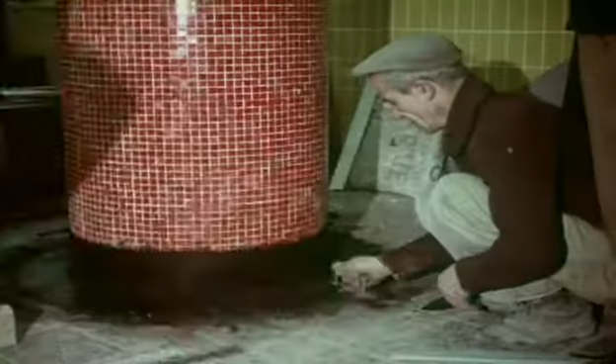Oxford Circus, base over apex.

With the first bite of the pneumatic drills, the TV cameras were rolling. But that night in Oxford Circus, only a small crowd looked in. It was the weekend, most people were out of town, and the models who saw it all in the fashions of 6 years ago couldn't talk.

So an operation began which had been on the drawing board for 18 years. It was, of course, raining. This was D-Day.

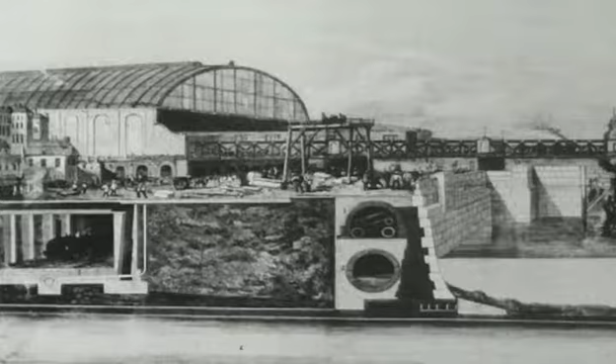In Victorian times, the great engineer Sir Joseph Bazalgette enclosed the Thames inside the embankment and built the main sewers to support 4.5 million people, essentially the same system trying to cope with 10 millions today.

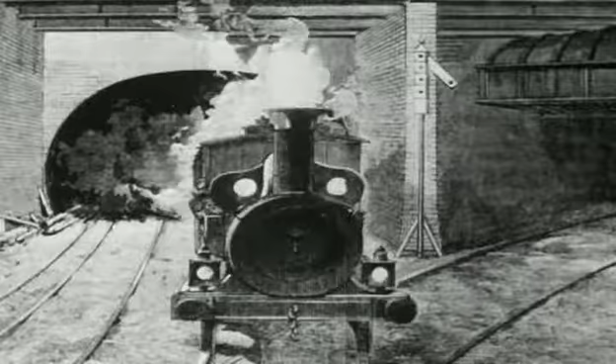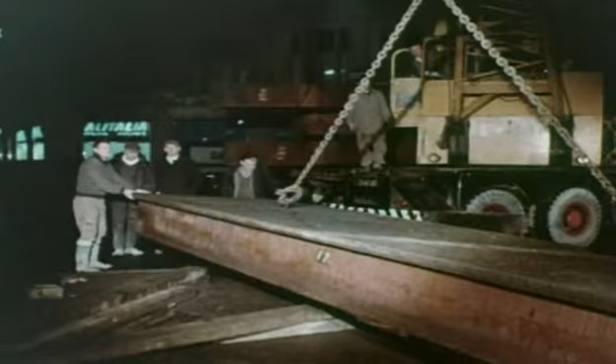In the 18th century, we established the canals, waterway roads. In the 19th, we led the world with iron horses. In the 20th, the technological age, it may be that the descendants of the Industrial Revolution are not so unworthy after all. Look at this, London.

Here's the plan conceived decades ago to relieve the indigestion of London's traffic by tunnelling a new tube line from Victoria to Walthamstow. Twin tunnels of 10.5 miles to link 4 mainline termini, Victoria, Euston, King's Cross and St Pancras, to slash right across the existing system and bring the underground to a new region in the northeast.

By any standard, it was a hell of an undertaking. No one knows all the secrets of brave adventure. In the autumn of 1962, the first phase was something of a small miracle.

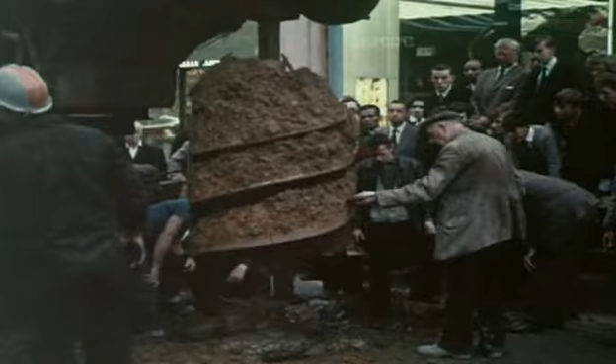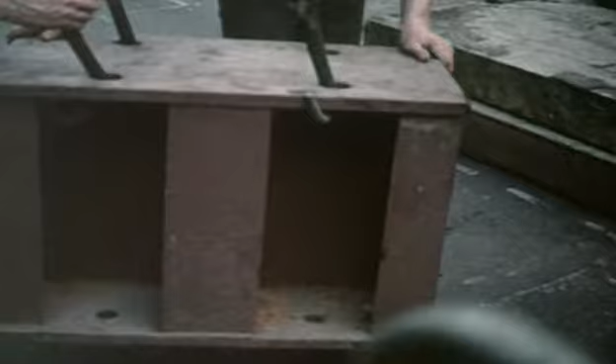Before they could begin mining underneath, as they were completed, the boreholes were sealed. Oxford Circus was almost ready for the opening of its steel umbrella.

To the outsider looking in, it all seemed chaos. Civil engineering usually does. But in fact, brute force and the muck of it is combined with a pernickety and almost an embroiderer's precision. Isolated in an island of noise, encompassed by the swirling West End traffic, the surveyor and his assistant worked with the calm concentration of an operating theatre.

They had to. The steel deck sections had to fit together without nuts, bolts or rivets, like a jigsaw. Otherwise it would be spillikins. They got it right to fractions of an inch.

Came that August bank holiday of 1963 when traffic and pedestrians were diverted. On the Saturday, the steel parts of the new umbrella, colour-coded and numbered, were ready. The target was that Oxford Circus had to be open for traffic by 6:30 a.m. on the Tuesday. Here's the story of a mere 65 hours.

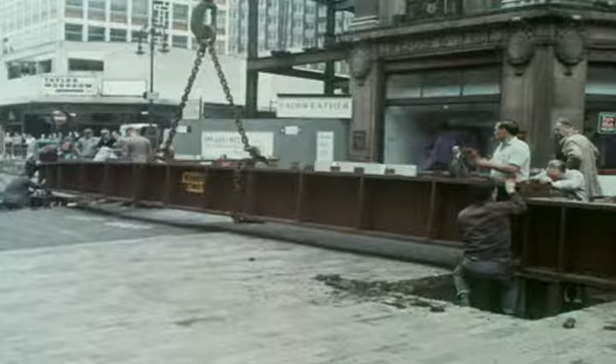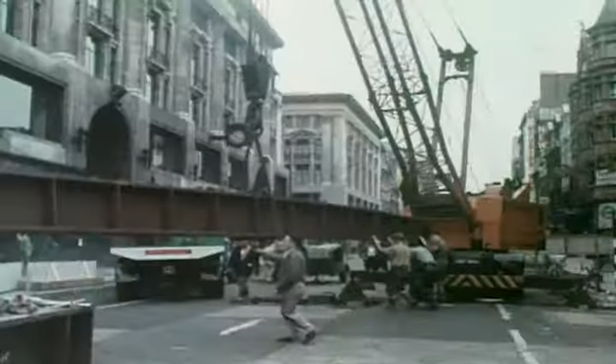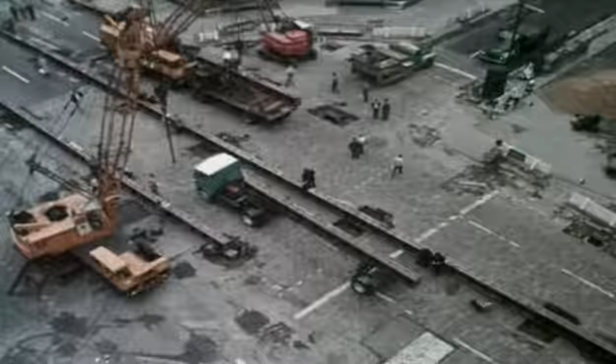The first girder went into position at 3:20 p.m. on the Saturday. Later that afternoon, the centre rib was nearly complete. At 7 o'clock, the first deck section went in.

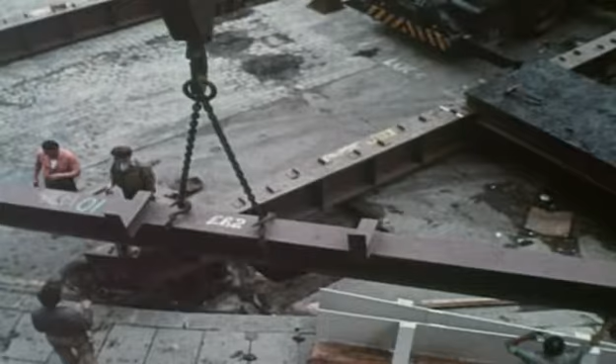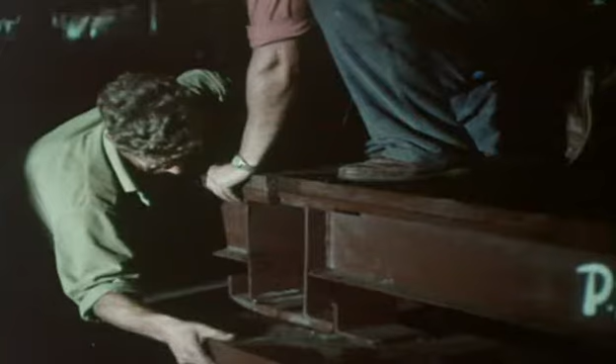The night shift took over, and the sections continued to fit. On Sunday morning, midnight: the one that doesn't fit has got to be this one. It's the last, and it does.

245 units in position in an average time of 11 minutes each. Just after midday on the Monday, with 18 hours to finish off the details, it was all over, bar the congratulations.

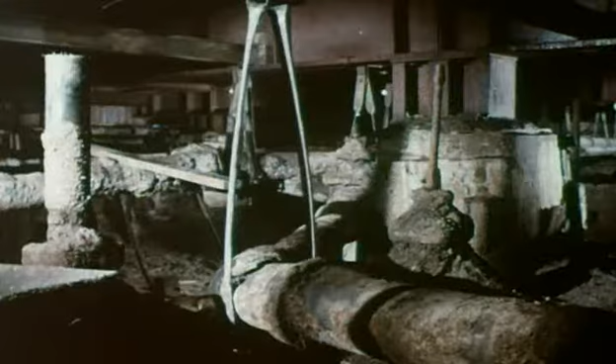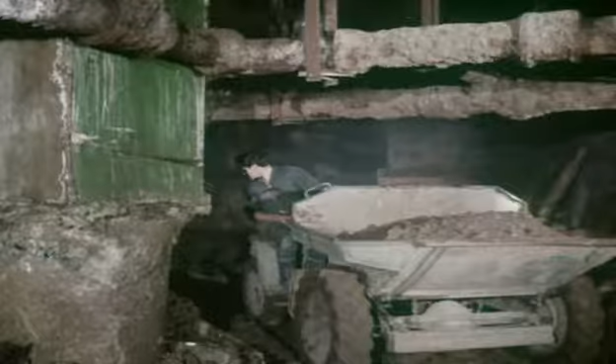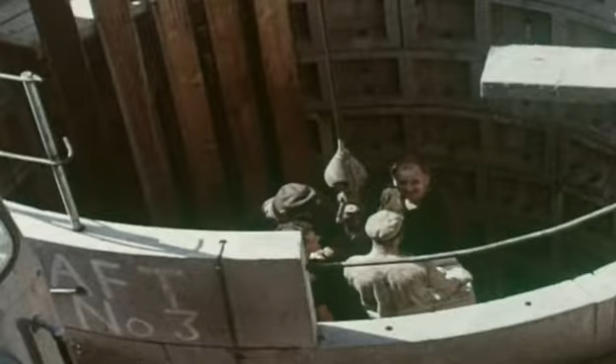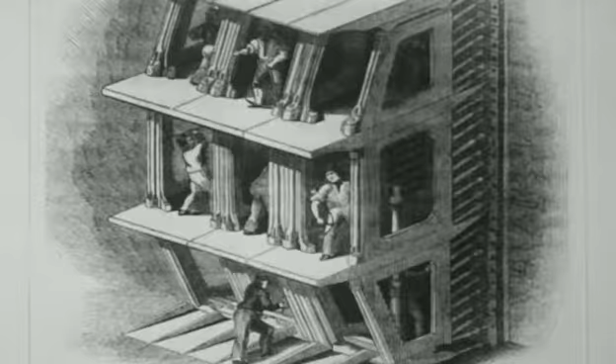We've advanced since then. A gang of 6 men working a modern rotary digger can clear a running tunnel through the clay at the rate of 2 inches a minute.

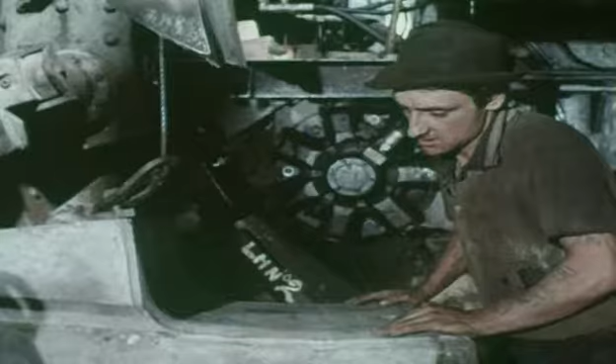The machines, lowered down the shaft to be assembled on the working site, can steer their tunnel accurately within a tolerance of 1.5 inches. They cut exactly to the diameter required for the passage of the trains. London clay, famous in tunnelling history since the 1890s, is the ideal medium in which to build a new tube railway, but it isn't self-supporting for very long.

So the tunnel lining ring must go in quickly behind the digging shield, 1 lining ring every 2 foot advance. Once every 15 minutes, the miners assemble a self-supporting ring of concrete behind the digger. No nuts or bolts, they just jack the segments under power and pressure into place.

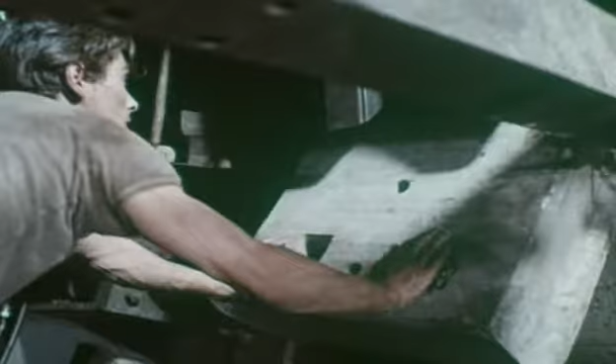The miners are specialists, working as a team.

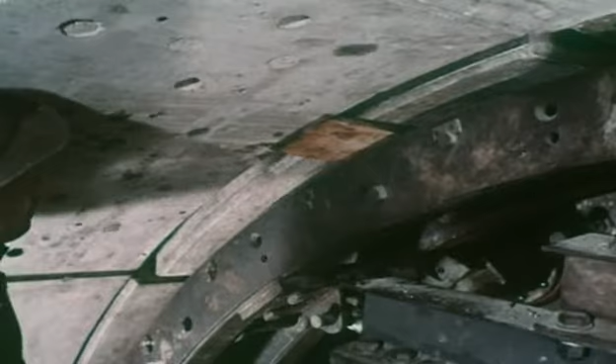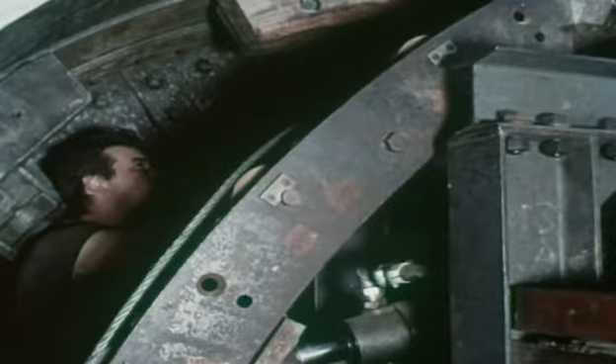Behind the shields, cutting the tunnels, there are long sleds and belt conveyors to get rid of the spoil. If you dig a tunnel, as any rabbit knows, you must get rid of what you kick out of it. Muck, that's what they call the clay, comes out fast. Skip trains haul it away from the diggers.

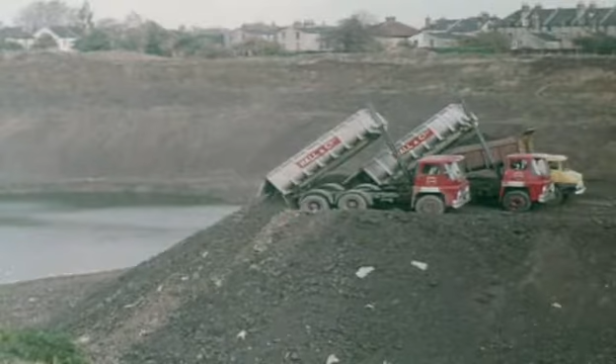And that's why we're doing it again. Underneath, the miners are clawing at the tunnel face to make a new artery for London. The first breakthrough, the meeting of two tunnels, is coming about.

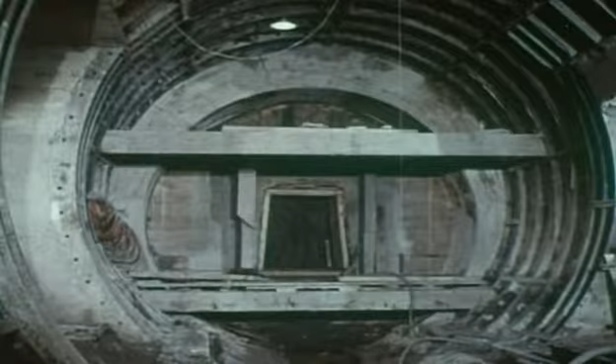The engineers, those cool men, are satisfied. Somebody else seems rather pleased with the result.

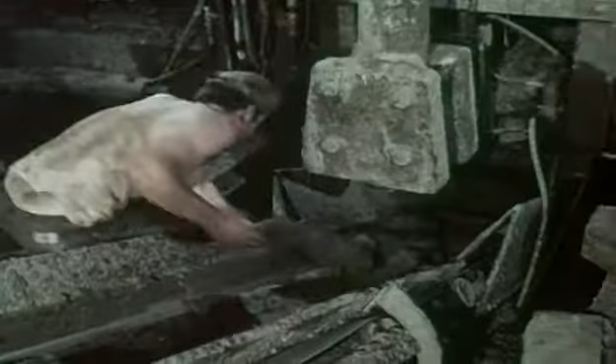The story of these islands. Sons of Ireland, almost all of them, descendants of the formidable navvies who dug the canals and laid the railways. The men who astonished Europe when the canals were cut in the 19th century, by cooking steaks on their spades over their bonfires. Back again, better paid, with pneumatic drills to help, to mine the new Victoria Line. Men with big appetites, mighty thirsts.

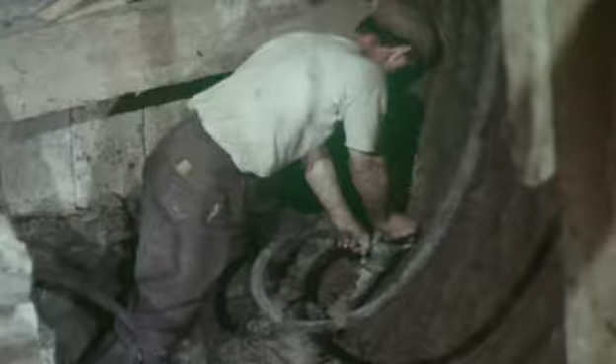It wasn't all plain sailing. While London slept, at a weekend in October 1965, a diversion was necessary at Finsbury Park to make life easier for future Victoria Line passengers. As a tremendous concession, the engineers were given 15 hours without trains to effect the changeover.

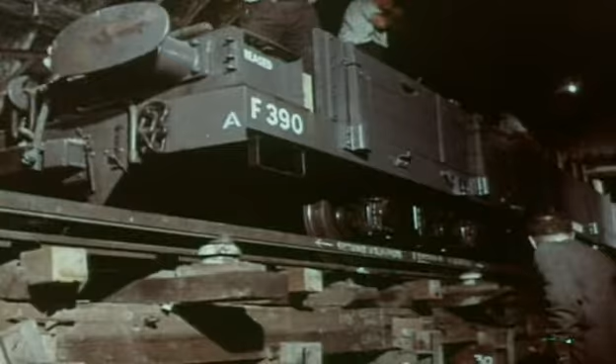As the last train of the night went through, and the passengers caught a fleeting glimpse of what was happening, temporary craneways built specially for the job lifted the awkward loads onto wagons which carried them away down the old tunnel. Every man on the operation was briefed exactly what he had to do. Millions of commuters would have asked the reason why if anything had gone wrong.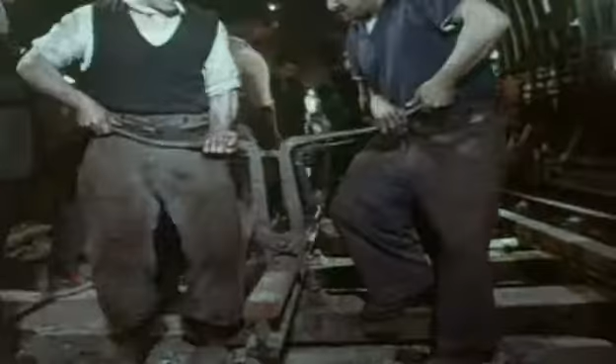But early that Sunday morning, the commuters were at home. Every move was meticulously timed. Old track removed, new track in readiness, new signals in the process of installation. What they did that night reminds me of the miracle of improvisation which was achieved on D-Day in the war. Apparently, we haven't lost something of the drive, at any rate, that we had then.

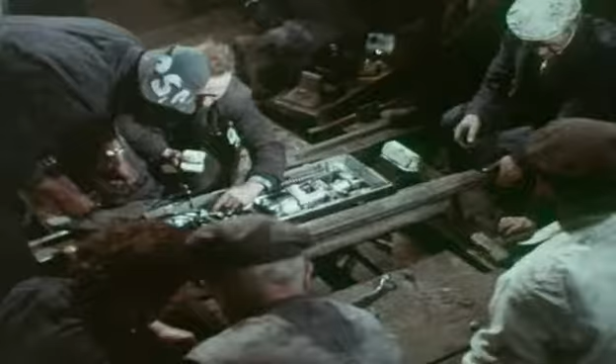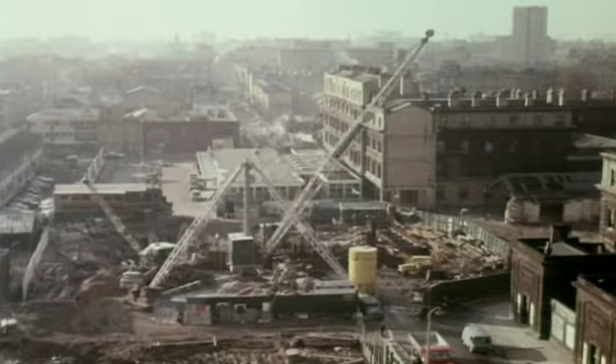Although London clay works well enough, the blue carpet underneath has holes in it. One of them is at Euston, where the line goes down to beds which are as waterlogged as a wet sponge. To prevent the water squeezing through into the tunnels, the workings had to be sealed off. High air pressure kept back the water until the work was done.

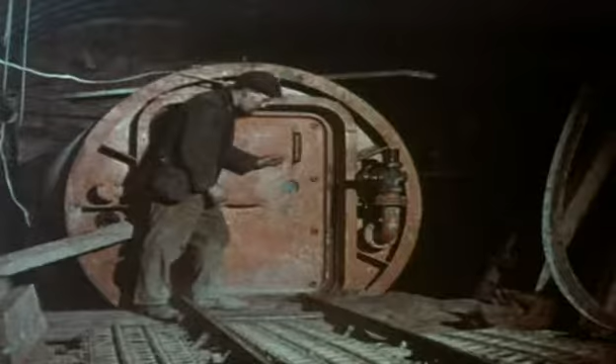It was like an episode in Doctor Who.

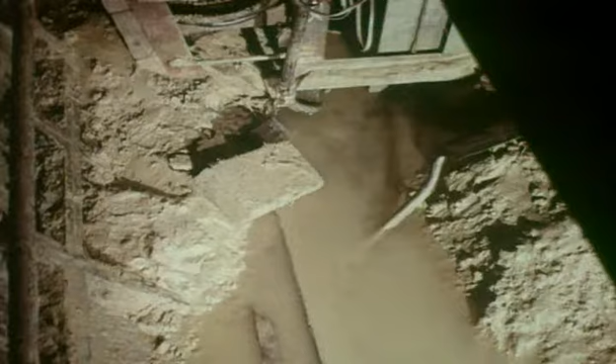But the engineers had anticipated all this. What they didn't expect happened in September 1964, under Green Park. A tunnelling shield working in the clay ran into an unknown pocket of water-bearing gravel. They had to dig the rig out. The wonder is that in a vast engineering undertaking, an investment of £70 million so far, that was the worst that happened.

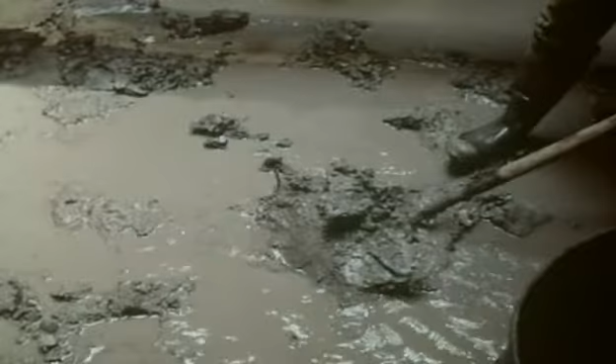There have been few comparable engineering achievements so bold and at such a small price in human life.

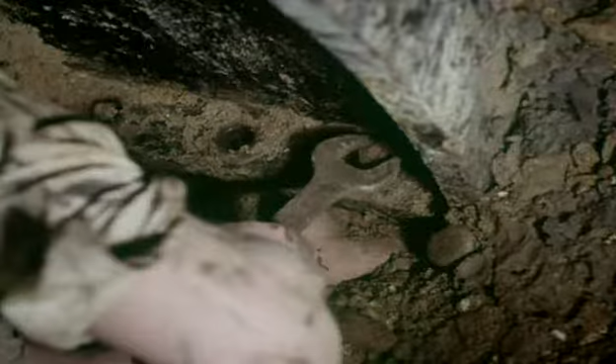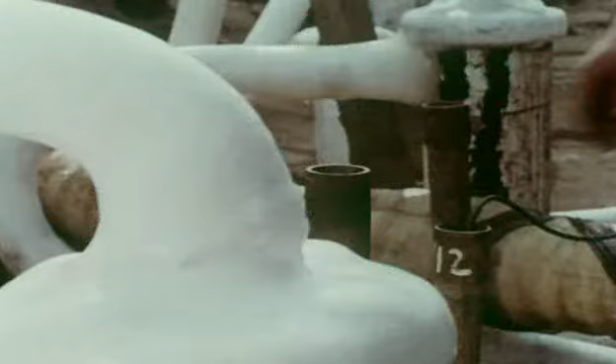During the hottest summer weeks of 1966, the engineers knew exactly what they were up against. At Tottenham, the ground was so wet that even in a heat wave, they had to freeze 500 cubic yards of it so that they could excavate and line an escalator shaft. If you have a scientific bent, liquid nitrogen, 350 below freezing point Fahrenheit.

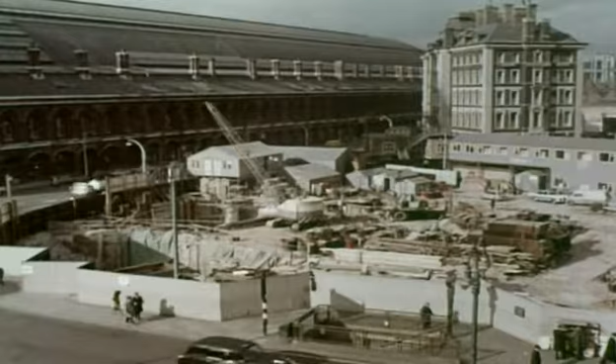King's Cross was another cross to bear. Railwaymen know it as the menagerie. The reason why is that so many systems above and below each other converge here. Through main lines from the Midlands and the East Coast. Cut and cover underground railways, the Met and the Circle, the Hotel Curve and the widened lines. Deep tubes too, for the Northern and the Piccadilly. King's Cross is riddled with railways.

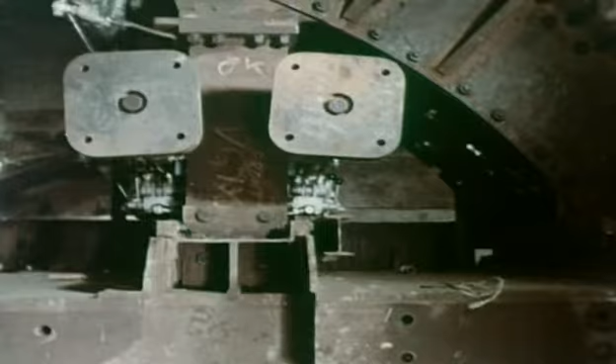The Victoria Line, the newcomer, has been threaded through the eye of a needle. To get it through, under and over job, without old tunnels collapsing or lines distorting, specially strong tunnelling shields with more than the usual number of rams were used to support the clay at the face. The new tube station was lined with steel rings instead of cast iron, and the stresses arranged so that they reached not into other tunnels, but into virgin ground.

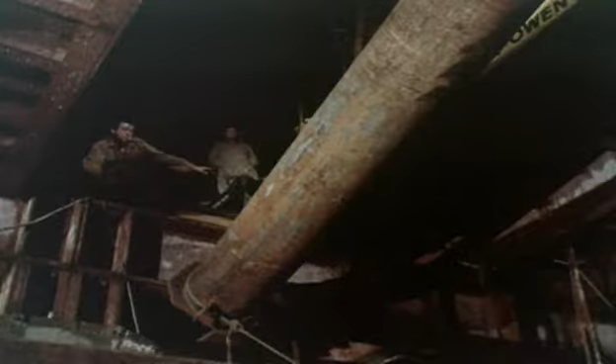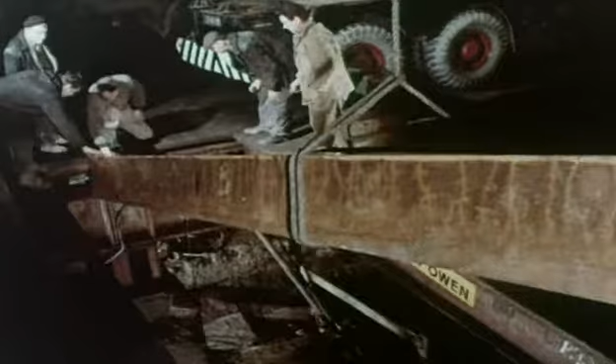The result of it all? Well, King's Cross still stands where it did. They themselves could scarcely have been expected at that dusty time to raise a cheer, but they might have done if they'd known more of what was being tackled. It was a smuggling adventure, getting stuff down in the night time when people weren't looking, putting it into a place within a few feet of the feet of Londoners overhead.

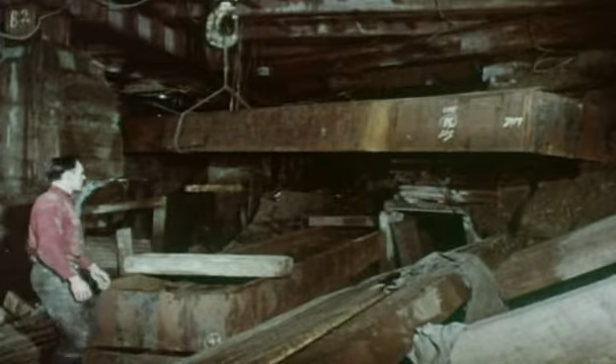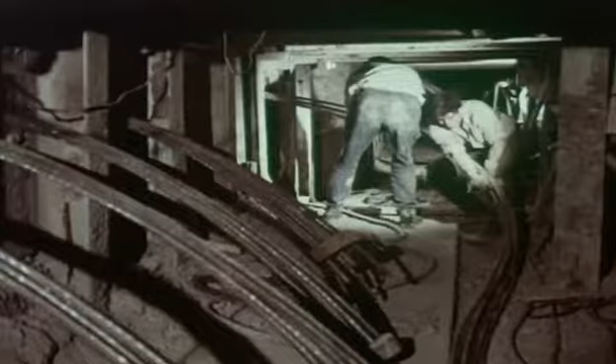Just how difficult an adventure was the challenge which faced the miners of the Victoria Line when they got to the point where there was a store sitting on top of them. The southbound station tunnel had to support the weight of Peter Robinsons - hats, dresses, tights, undies, and all. The store has three basements. While the women were admiring themselves on top, the miners put a concrete raft under their legs underneath. Bread and butter work for engineers, working in tight holes underground.

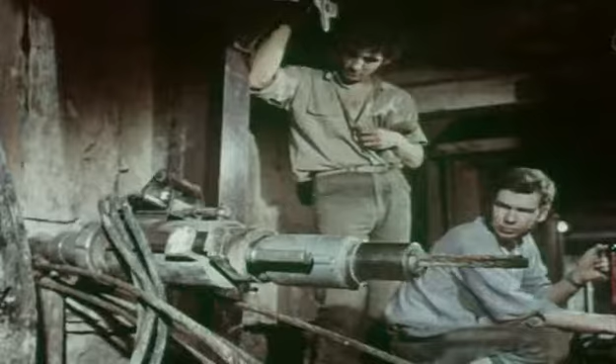Two worlds. Up above, where everybody feels as safe as houses. Down below, where they carry buildings on their shoulders.

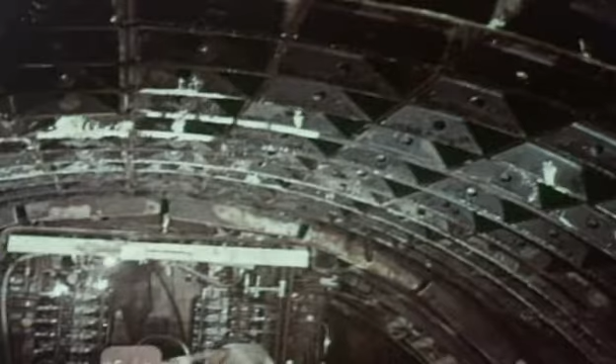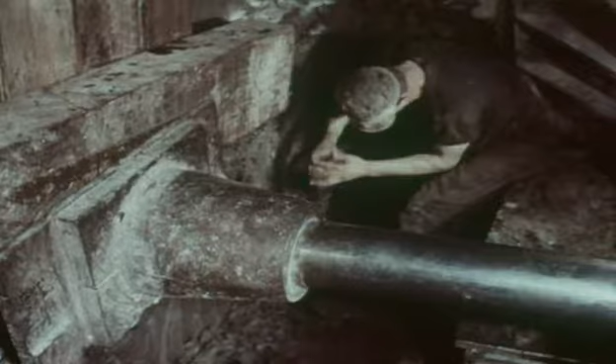In November 1965, the diggers on their way south reached the concrete raft and skimmed safely underneath it. London, which has never stood still, was advancing again.

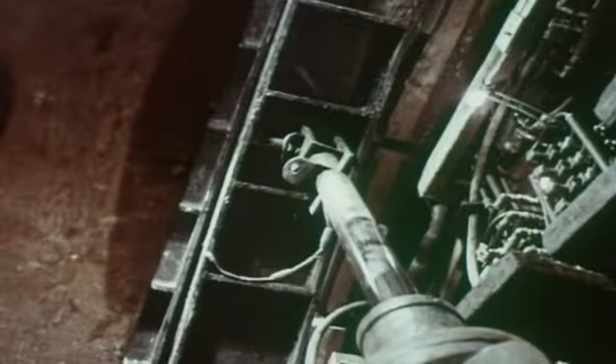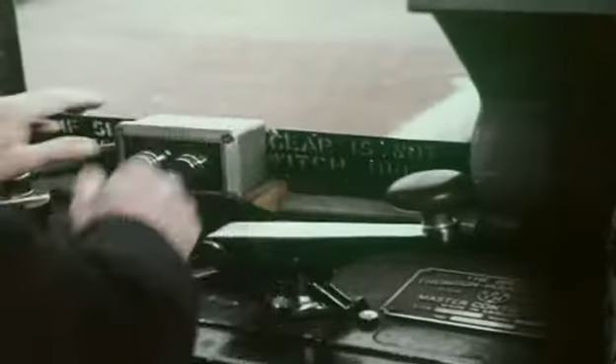In truth, the Victoria Line, all its trains along its whole length, is ordered by a couple of men in an operations room by Euston. And even they don't have to interfere unless there's a technical hitch. The driver is in telephone communication with them. He has a public address system to talk to passengers, but, well, all he really has to do on the Victoria Line, I could do myself, and have.

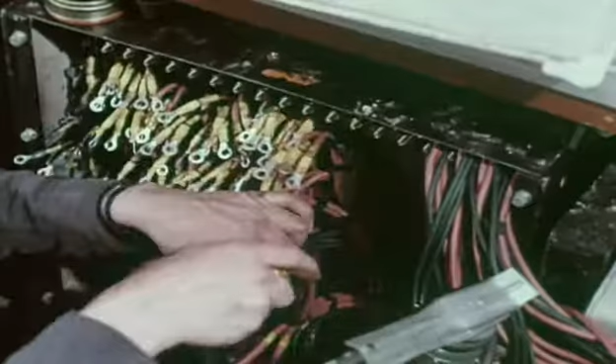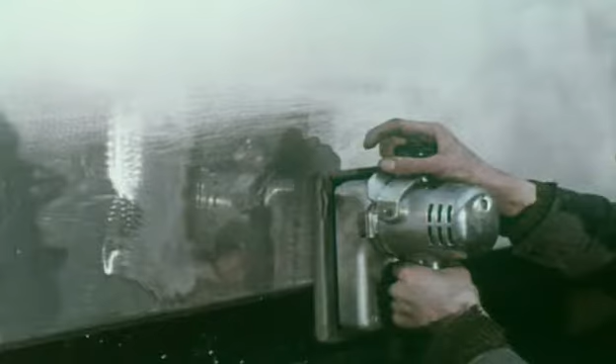For braking and acceleration checks, each experimental train became a mobile laboratory, driven manually and under automatic control. Boffins studied performance, satisfying themselves the way boffins do, with graphs, slide rules and tape measures.

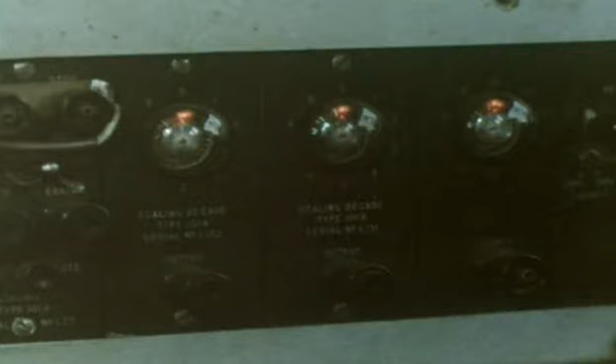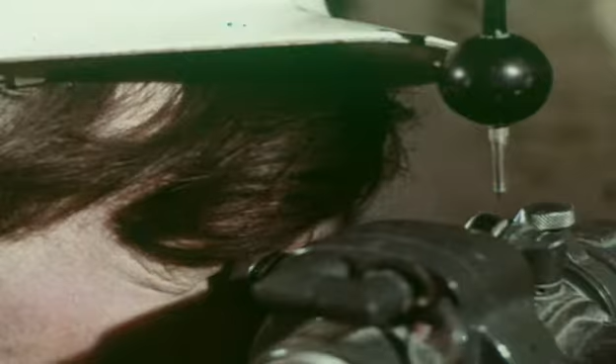Trains can't work without rails. Anyone who has stuck the rails of a toy one together knows how easy it is for the whole caboose to turn over. I wonder how the experts get on with their children's toy trains at home. At work, it's different.

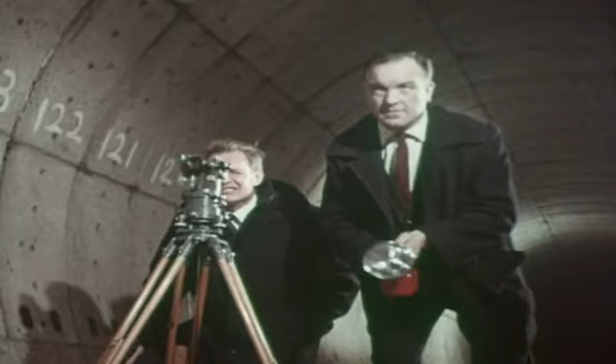The wonder of this operation is that there's nothing new about a cement mixer.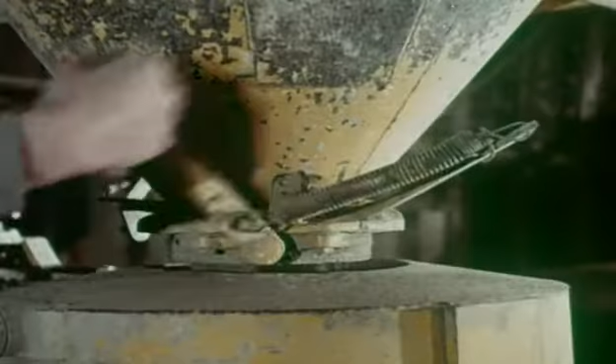What was new is that it becomes a little more difficult to install and operate when the stuff for the pudding has to be lowered into a netherland and mixed in a plant which in its turn has been humped to the bottom of a working shaft. Millions of tons of concrete were needed for the bed of the new line, all to be shifted load by load through the complex of new tunnels.

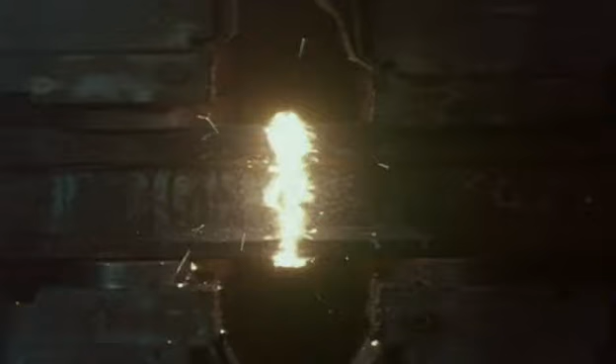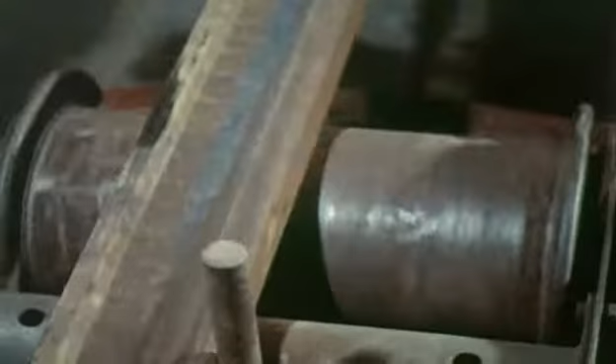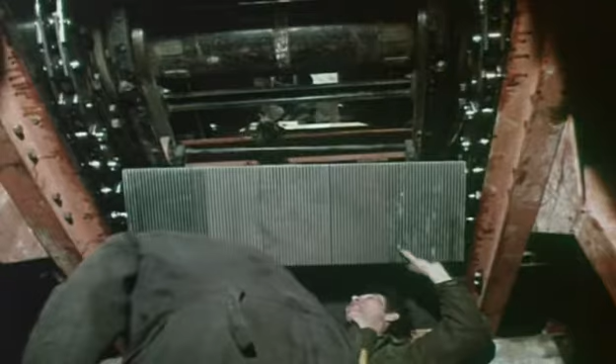The Victoria Line has called for 42 new escalators. When London's first moving staircase began to run at Earl's Court in 1911, a man with a wooden leg, nicknamed Bumper Harris, was employed to ride up and down all day to show Londoners how safe and easy it was. Londoners don't need reassuring anymore, but the engineers do.

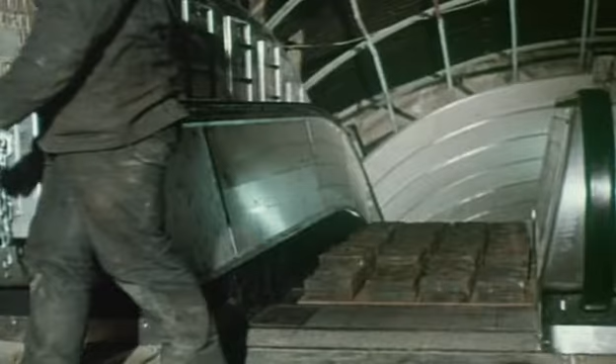Working on full load, 1.6 passengers per step, 5 tons on 50 steps, the escalator must stop in an emergency in 4 feet 2 inches average. It does, but carry dogs and fold your pushchairs.

After nearly 6 years came Easter 1968. While the rest of us were on holiday again, it was time at last to fold the umbrella over Oxford Circus. They folded it so fast that time schedules went for nothing.

The traffic rolled again, but not over the old Oxford Circus. A new wonderland had come into being underneath.

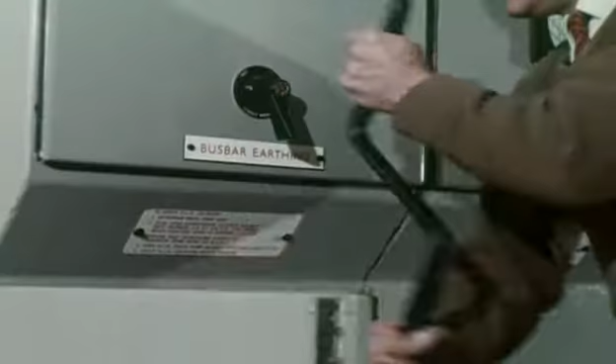You can call this lighting up time. When the hour came last year to open up the first sections of the new line, the signal went to Lots Road to switch on power. An exciting moment for the electrical engineers. They'd done their homework, but they wouldn't have been human if when the signal went to check, they didn't stand and stare.

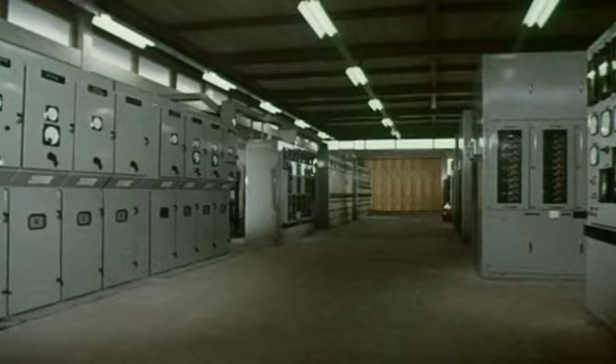Along sections of the line, not yet to Victoria, the power was on. The pattern of automated transport, after years of work, was emerging. This is the road to the world of the 70s. Regret the past if you like horse-drawn traffic. But this is where we're all going. No hands.

Not quite Orwell's 1984, or Aldous Huxley's Brave New World, but here it comes, inexorably, unavoidably, inevitably. The machine is beginning its rule. A network of interlocking machines throughout the Victoria Line gives communication at the speed of light.